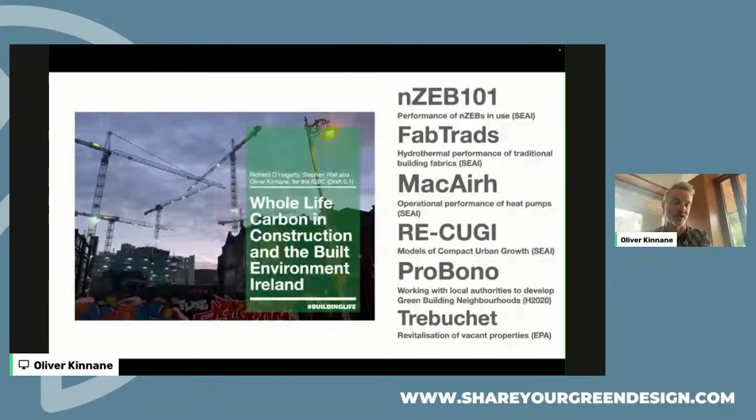We've got projects around historic building fabrics, heat pumps, modeling compact urban growth, and different typologies of urban growth. We're working with local councils on European projects to develop green building neighbourhoods, and with the Environmental Protection Agency on the revitalisation of towns and properties within those towns.

And the work that I present today is really a team effort. There's many people, both at postdoctoral level, research fellow level, and a big team of PhD students working together on these projects to try and deliver and direct us in how we achieve these very ambitious targets that we've set to 2030 and all the way out to 2050.

And I suppose one theme that links all of these projects together is the idea of retrofit, and retrofit is what I'll be talking about today. The title of the talk, 'The Careful Now, Let's Avoid Retrofitting Today's Retrofit,' really stems from an appearance I made last year when I was invited onto a parliamentary committee here in Ireland, what we call the Oireachtas committees.

There I was invited to talk about whole life carbon in construction, particularly the embodied carbon of construction of the Irish built environment. And flippantly, at one point during the conversation, I predicted that we'll end up retrofitting today's retrofits within 10 years. That statement was probably the only thing reported from the whole appearance, and it was met with a high level of hysteria in the media that kind of caught me off guard.

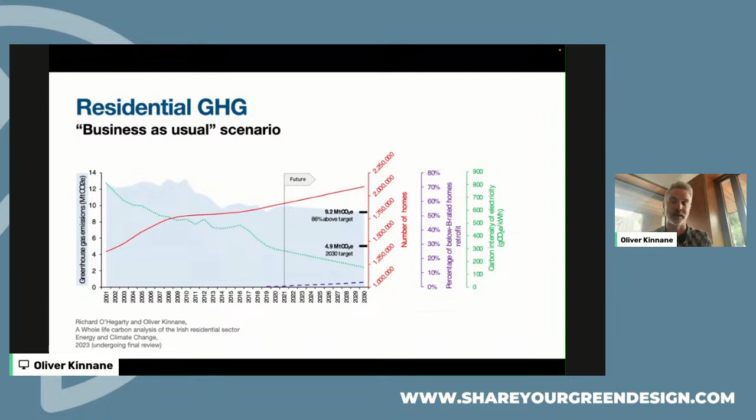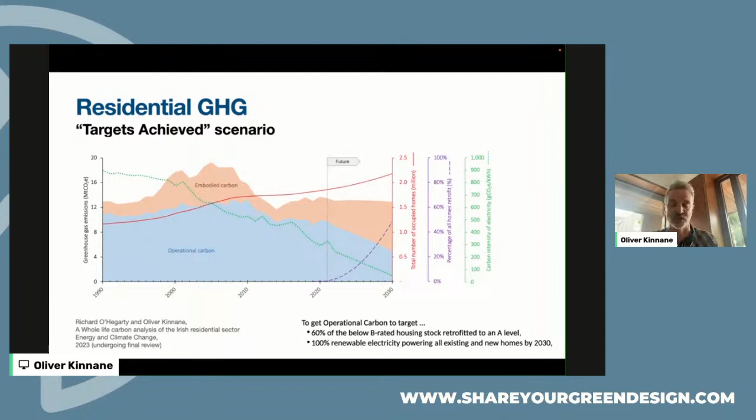We really need to achieve those targets of a reduction in operational carbon, because in Ireland, like in many countries, our population is increasing. We already have a housing crisis, and we need to solve it by building homes. That building of homes is actually going to bring significant embodied carbon with it, so we need to reduce the amount of carbon related to the operation of our buildings if we're going to create space in our carbon budgets for this additional carbon.

If we look at the built environment more broadly, what our studies have shown, and our major paper in this field, the whole life carbon quantification of the built environment, case study Ireland, which was published in Building and Environment in 2022 and is available on Science Direct, is that through a range of accounting measures, the built environment in Ireland accounts for 37% of all greenhouse gas emissions.

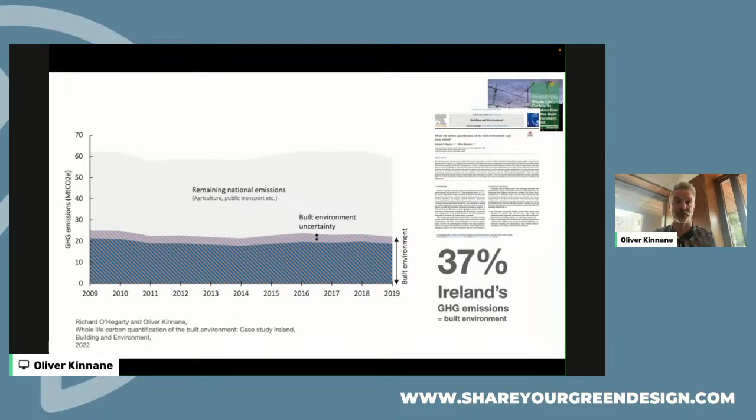So it's as big as any other sector in the country. In Ireland we have a very big agricultural sector, much maligned, and that sector is itself 37% of emissions. So the built environment is as big as the other big sector in this country. And that 37%, which is more or less what other countries have reported, maybe not in as great detail as we have in Ireland, but many countries around the world are somewhere between 30 and 40% of their overall emissions related to the built environment.

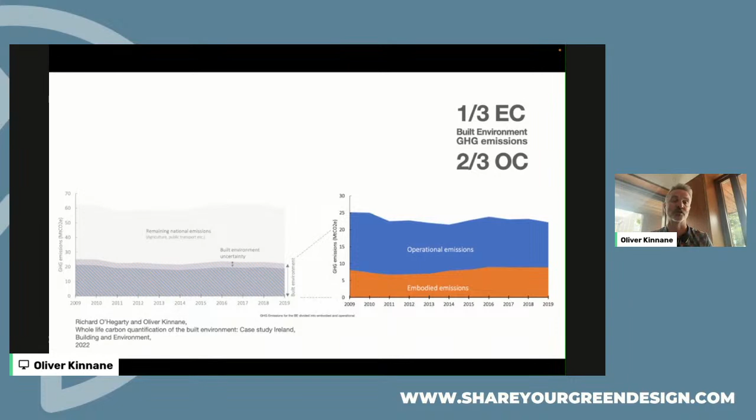In Ireland, that is split one-third, two-thirds between the construction and maintenance of the built environment year on year and the operation of the built environment. So really the key point is that operational emissions are the majority share, accounting for two-thirds of all carbon emissions related to the built environment in this country. So to reduce the overall impact of the built environment, we really need in the first place to reduce the operational emissions related to our buildings.

And retrofit is a key strategy for this. In Ireland, we have a national retrofit policy that says we should retrofit up to 500,000 of our homes - that's over 25% of our homes - by 2030. So it's a massive increase on the amount of retrofit that we're carrying out today.

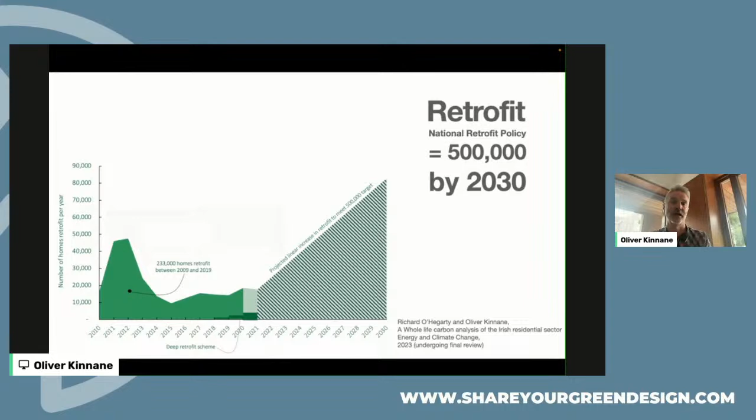So my point is that if we're going to achieve and carry out all of this retrofit, we really need to get it right. We'll end up adding lots of materials to these buildings, and we will have to make sure that we do get it right, and that we get it right first time.

And that's because the embodied carbon of retrofit is not insignificant. We often think that the building of new buildings is the carbon heavy choice in the built environment, and that retrofit and reuse of buildings is not, and is the better choice. But what I'm saying here is that the reuse and retrofit of buildings brings significant carbon emissions itself.

And we've quantified this through looking at a couple of different case study buildings. This is one example of small 40-metre squared social housing in the southeast of Ireland which were retrofit. These are cast concrete one-bedroom homes, retrofit using external wall insulation, renewable PV panels on the rooftops, heat pump technologies - each home getting an individual heat pump, which is questionable - but also windows and building fabric retrofit.

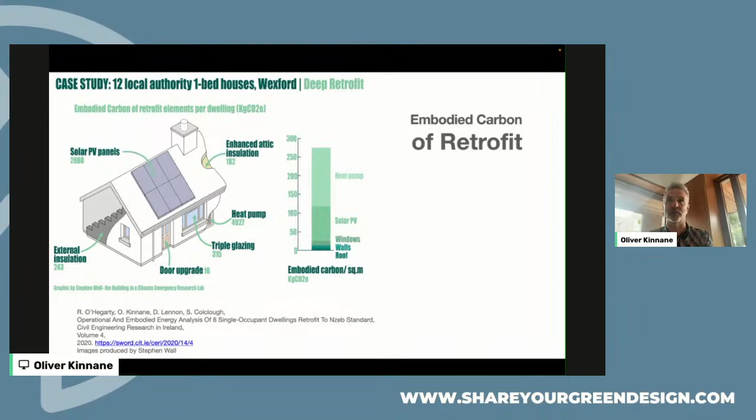And what we see is that the embodied carbon of all of this addition of materials and technologies brings a significant embodied carbon total with it, up to somewhere between 250 and 300 kilograms of CO2 per metre squared of floor area. So that's really quite significant. If we look at the academic literature, particularly in the A boundaries of LCA analysis, we're often looking at an embodied carbon of new homes somewhere between 800 and 1,000 kilograms of CO2 equivalent. So retrofit is somewhere around 25-30% of the impact of new build.

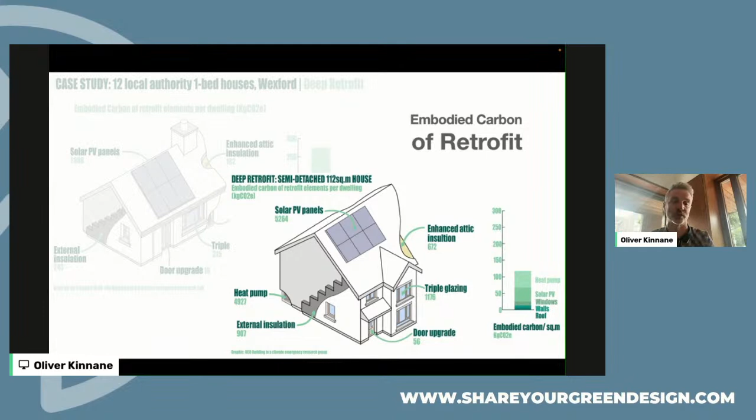Extrapolating that out to a kind of more standard Irish home, this semi-detached home that's built on the edge of Irish towns and cities and creates this continuous urban sprawl - and that's a whole other topic, and we have research projects that look at the alternative choices to development in this country and beyond - but again, we see that these kinds of homes bring significant embodied carbon of over 100 kilograms of CO2 per metre squared of built floor area.

If we look at Ireland's carbon emissions over the last few decades, or all the way back to 1922 when Ireland won its independence and became an independent state, we see some areas where we added a lot of housing, and the fingerprint of that construction of our built environment is very much evident in the overall carbon emissions of Ireland.

We used a lot of concrete, almost 40% of our emissions came from concrete. About another 40% came from metals, so that's the importation of metals into Ireland. We don't produce any metals, aluminium, iron or steel anymore, so we import those emissions from elsewhere. In a consumption-based emissions accounting, we can see that both concrete and aluminium and other metals add up to about 80% of our overall embodied carbon of the materials we use to develop our built environment.

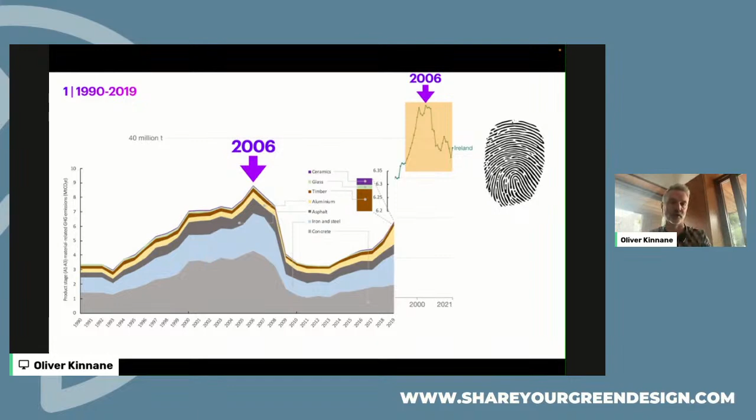Another reason we need to be careful when we talk about retrofit is because when we do retrofit, we don't always get it right. We as a research group do a lot of post-occupancy evaluation of buildings, and looking at one particular one-bedroom small social housing scheme, we wrote a paper on it.

They were all designed to be retrofit from F and G ratings, very low building energy ratings, very poor building energy performance, up to an A2 standard, that's less than 25 kilowatt hours per meter squared per year. What we saw when we went back into those homes post-retrofit is that very few of them are performing at that standard, although you'd expect these small, simple homes to retrofit and achieve those rating levels.

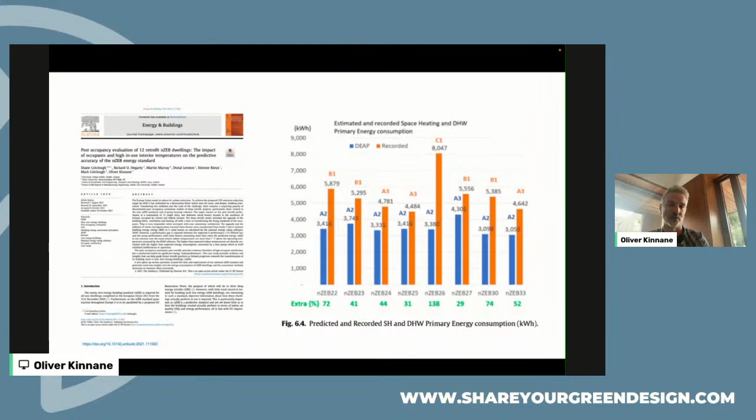In fact, many of the homes were operating in B categories and even in certain cases in C categories. And we see this across a lot of the homes that we monitor.

Going back to the national retrofit policy of 500,000 homes, an additional part of our climate action plan here in Ireland is to add over 680,000 heat pumps by 2030. So not only are we retrofitting 500,000 homes, we're adding heat pumps to all of those homes and changing out the fossil fuel heating systems for electric heating systems, plus more heating systems into new buildings that are going to be built.

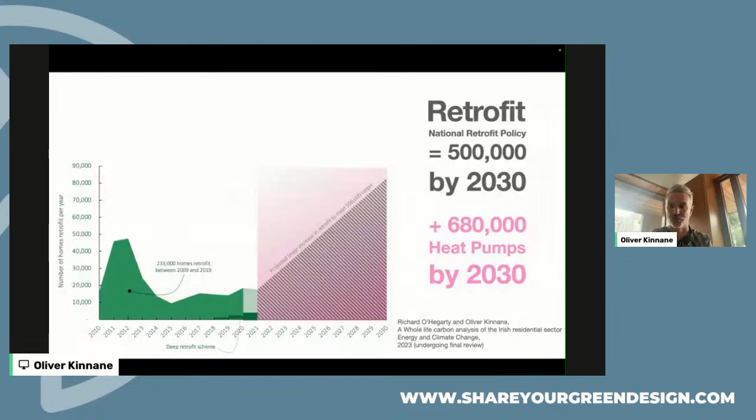We do a lot of work, and we've had a number of projects where we've looked at heat pumps in use in near zero energy buildings, new and retrofit buildings. What we see in some cases, and actually in many cases, is that heat pumps are performing well below the levels that manufacturers claim they'll perform at.

In this graphic, the red dot is the declared performance by the manufacturer, the coefficient of performance, plotted here against the temperature difference between the flow temperature within the heating system and the outdoor ambient air temperature. What we see when we look at the grey dots, which are the in-use performance over a year of operation, is that the in-use performance is well below the optimum performance line as declared by the manufacturer.

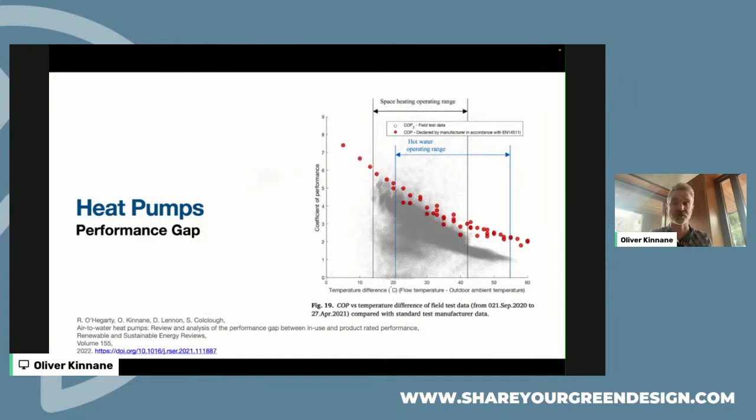What we really see on average is that coefficients of performance of heat pumps are somewhere around 2.5, with manufacturers claiming 3.5 and 4 and even above in newer technologies today. This performance gap is actually seen in a lot of studies that have been done, particularly studies done by UCL, who work with large data sets, and they've seen low performance as well for heat pumps.

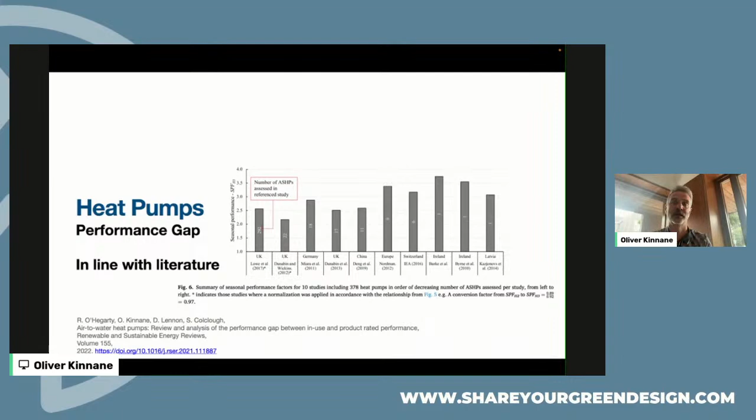This is something I think we really need to be aware of, particularly if we're going to mass roll out this technology between now and 2030. We need to learn how to install these technologies correctly, how to operate them correctly, and we need to inform occupants, particularly home occupants, how to operate these new heating systems that run at much lower operational temperatures than old fossil fuel boiler systems. We need to educate homeowners in how to operate them most efficiently.

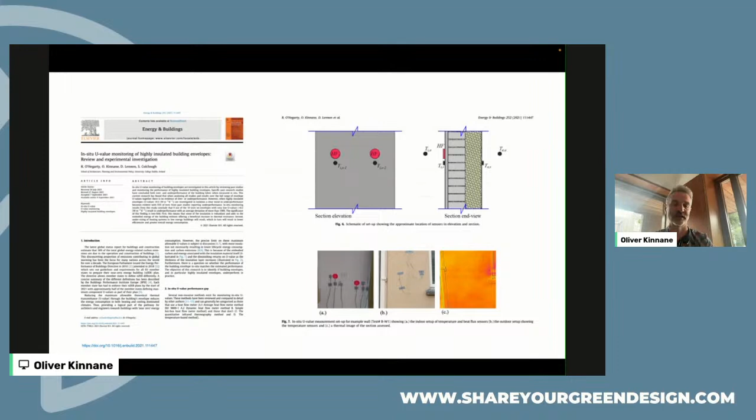Another test study that we did when we looked at retrofit homes was to use heat flux sensors and attach these to the building envelopes to understand the heat flow or heat loss through these building fabrics post-retrofit, in some cases, and also in new builds. But what we see in many cases, particularly in the retrofit examples, is again a performance gap - underperformance of these building envelopes relative to the designed-for performance.

I'm highlighting these things because I think these results are significant - we are carrying out a huge amount of retrofit, and increasing the rates of retrofit year on year in this country, around Europe, and all across the world. But there's actually very little study of whether this retrofit is actually working, whether we're achieving the efficiencies we think we're achieving.

This is a call I always make for much greater funding of research into buildings, particularly as we move towards these mass strategies to try and reduce the impact of our built environment. We need to check, we need to make sure that the strategies we're choosing are actually most appropriate and actually working for our benefit.

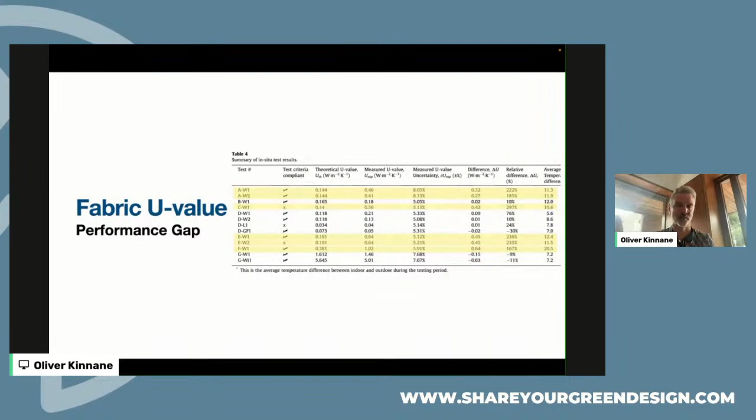Highlighted here in this table, and I direct people to the paper if you're interested, is a number of building envelopes that we tested, many of them showing underperformance, oftentimes by multiples, up in some cases to 200%, 300% over the designed-for performance.

We're still working through finite element modelling studies and further on-site testing, although oftentimes it's quite difficult to get into the building fabric and start tearing it apart to really figure out why these fabric retrofits are not working as they should be.

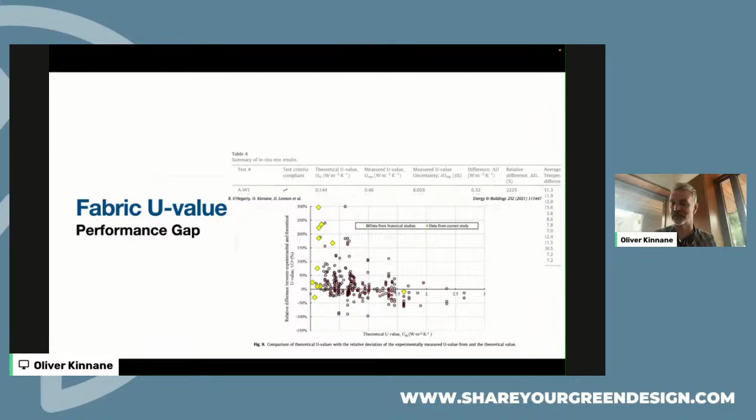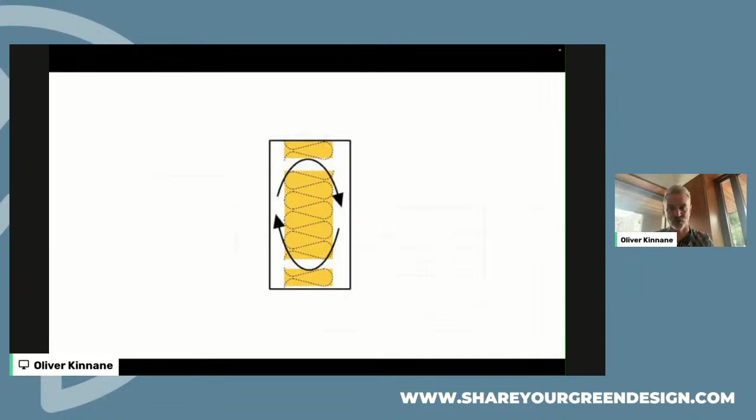But what we're beginning to see through our modelling studies and our on-site studies is that in a lot of cases, when we're adding insulation to building fabrics, we're creating gaps between the fabric and the insulation, and gaps between the insulation layers. What we actually see is convective currents or air currents in and around the insulation, very much undermining the value of the insulation in reducing the conductive heat loss through the thermal transmittance of the building.

Lots more care is required when we retrofit our buildings, I think, is the conclusion of that study.

Another point I'd like to make is that when I say we need to be careful when we do retrofit, it's because we still don't know nearly enough about buildings. We do very little post-occupancy evaluation of our retrofit buildings, so we really only have small pieces of information about the actual post-retrofit performance of buildings, and our knowledge of building physics is still very much at a nascent stage.

Buildings are really complex heat transfer systems, increasingly so as we add new technologies to these buildings. We really need to start learning and researching buildings.

In Ireland, the focus of our building regulations has been very singularly focused on the building fabric and continually reducing the U-value of that building fabric. It's now 0.21 - I think for residential buildings it might even be 0.18 watts per meter squared Kelvin now. That U-value requirement has reduced continuously with every new iteration of building regulations since they were first introduced in the late 1970s.

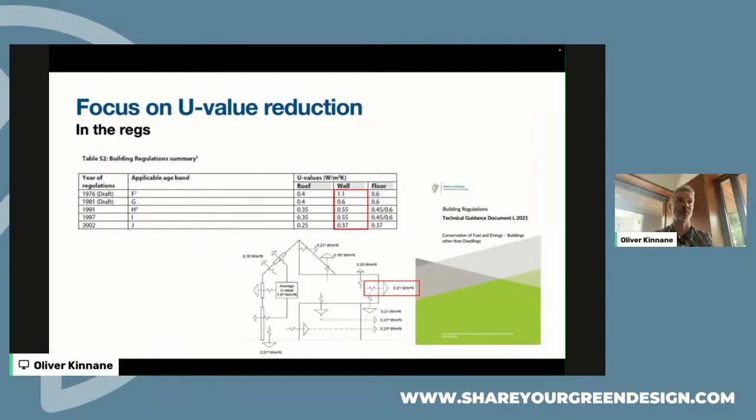What that has meant is that the majority of retrofit, particularly fabric retrofit, is focused on adding insulation to the building fabric. That is okay in the situation of contemporary buildings, where each layer has a particular requirement or purpose, and there are weathering layers to ensure that water doesn't transmit into the building fabric.

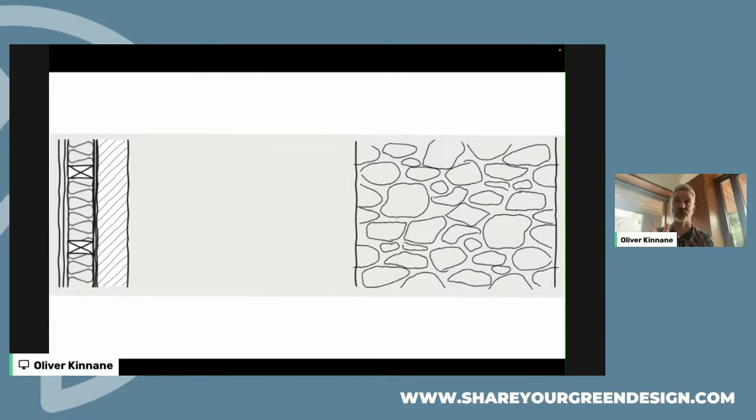So the image on the left is the contemporary building fabric. The image on the right is the traditional building fabric, and 1 in 6 of our buildings in Ireland are built using this or similar kind of fabric, with stone and clay and materials dug up from around the country - different kinds of materials, resulting in quite different kinds of fabrics from around the island of Ireland.

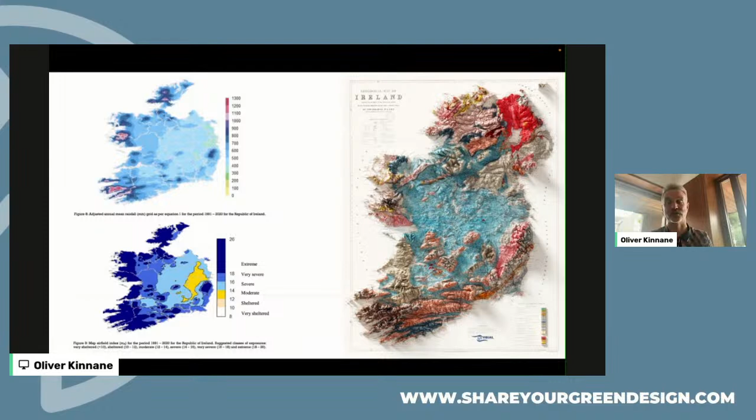Ireland, I think, is a particular case study as an island on the west front of Europe, very much an Atlantic storm-impacted island. What we see is that we have a lot of rain in Ireland - it's not raining today, but it's not far off it, and I bet it's raining out the west of Ireland. We get high levels of rain along the west coast, and we get high levels of wind-driven rain particularly, shown in the bottom left image here.

And what that means is that we get a lot of moisture in our building fabrics.

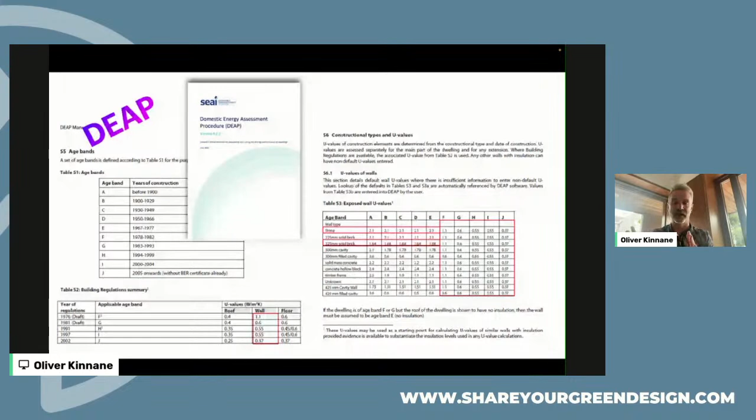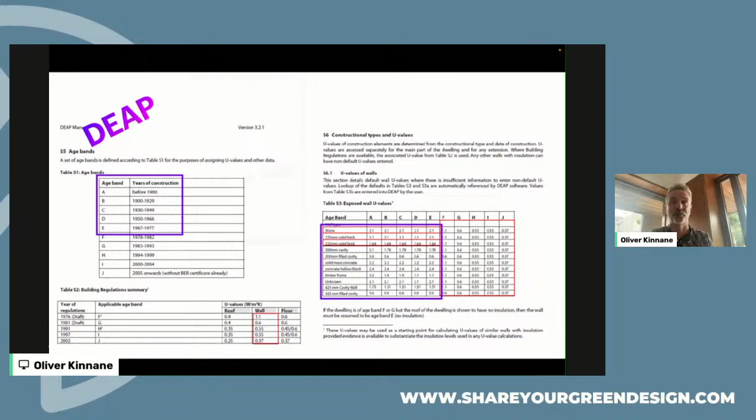When we look at our DEAP assessment methodology, which is how we rate buildings in Ireland, we don't actually have specific U values for buildings built before 1970. Those buildings, for different typologies of construction, are just given default U values. So when we rate these traditional and historic buildings, they often come out with a very low building energy rating, and the homeowner rushes to insulate those buildings using materials that are often not appropriate for buildings with moisture in the building fabric.

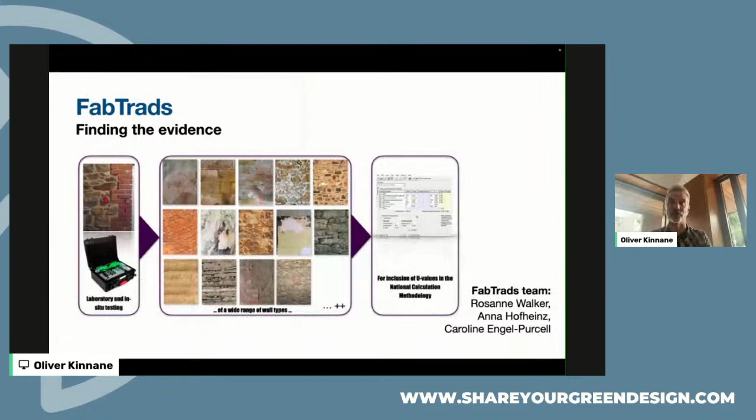We have a project here in UCD called the FabTrads project, supported by the Sustainable Energy Authority of Ireland and the Department of Housing, where we're testing a wide range of historic and traditional building fabrics. When we do in situ testing, we see many of these walls performing with better characteristics than we might presume. Not all of them - particularly in cases of high levels of saturated walls we see poor performance - but in many cases these walls perform better than the default value.

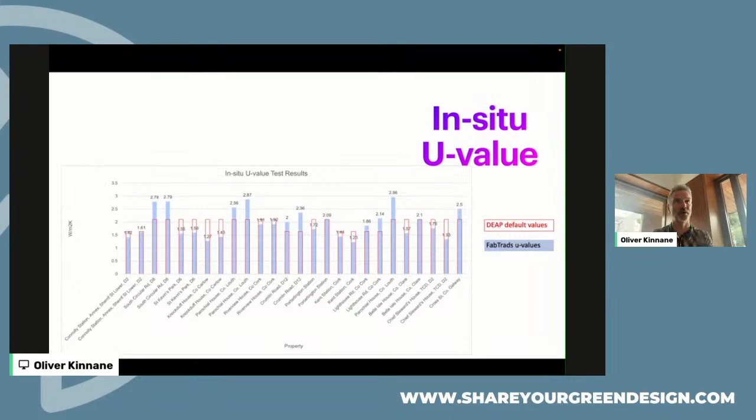The conclusion is that maybe we don't need to rush to insulate these buildings if they're performing better than expected. Certainly we shouldn't be rushing to insulate them using materials that are inappropriate for the long-term sustainability and preservation of these buildings, because adding impermeable materials causes buildup of moisture and risk of mold growth within the walls.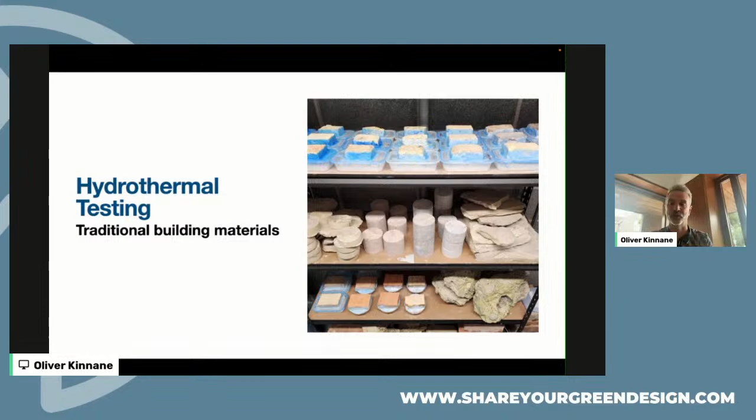We're testing these hydrothermal properties in the laboratory to see, for different brick types and stone types in Ireland, what the uptake of water is. We do that through a wide range of tests of thermal conductivity and different moisture transmittance mechanisms through these building materials.

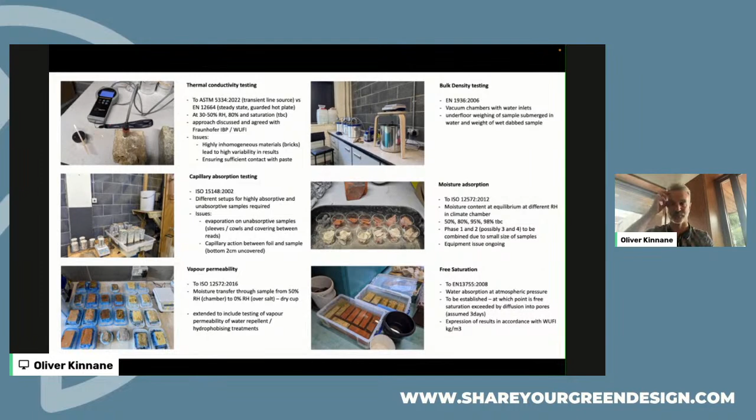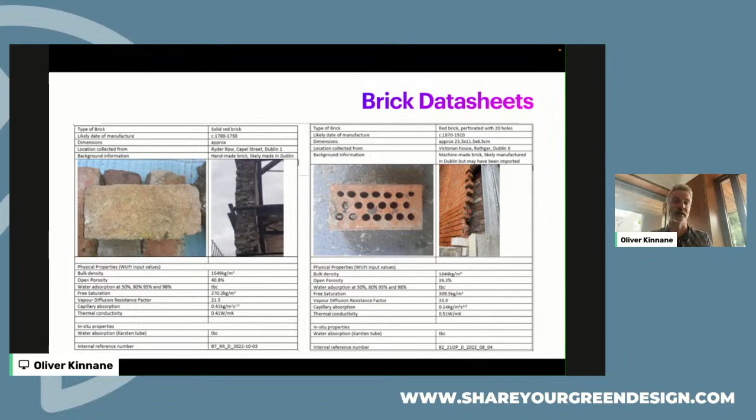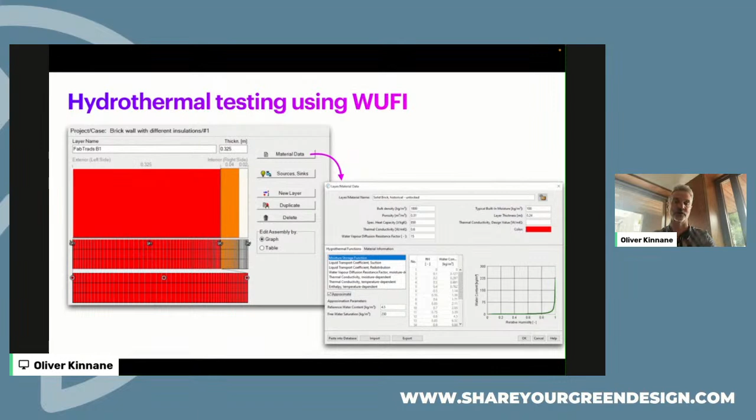In the FabTrads project we're trying to develop data sheets for the wide range of building materials in historic and traditional building fabrics, and bring that database of materials into the WUFI hydrothermal software, where designers and architects can select the Irish material database, select materials with measured properties in the Irish context, and use those to model thermal and hydrothermal movements in the building fabric.

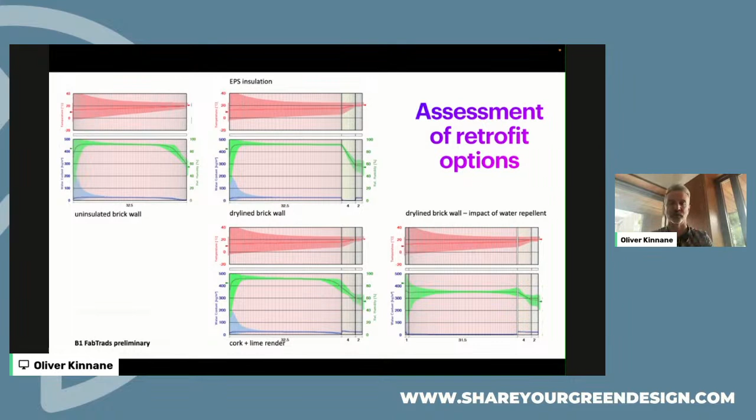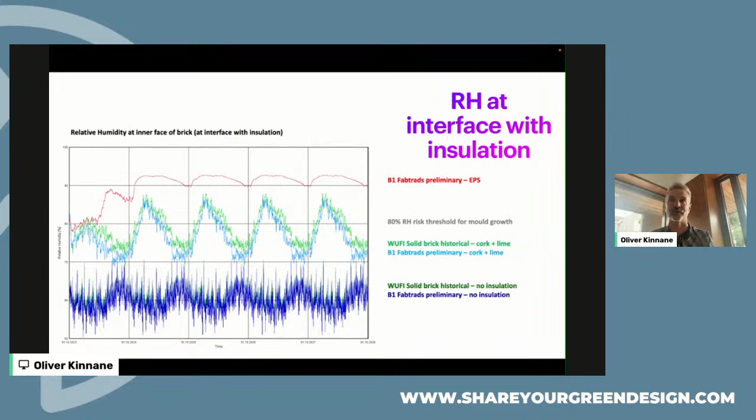I'm not going to get into detail on these modeling studies - this project is only a year old, so these are just preliminary results. But we do see very high levels of risk of mold growth within traditional buildings when we use materials that are inappropriate, particularly for moisture transmittance. When we use impermeable insulation products such as PIR board, phenolic foam, or other polymer-based insulations - which are being pushed continuously in the drive to reduce U values and create more energy efficient buildings - we see high risks of mold growth at the interface between the building fabric and the insulation.

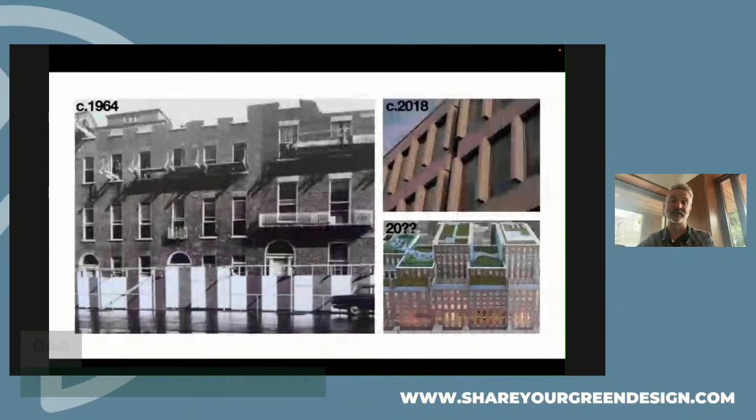Another reason we need to be careful when we talk about or do retrofit is to ensure, from a whole life carbon perspective, that we don't continue on the wrong path. We don't want retrofit to add to the case for demolition of buildings that are presumed to be inefficient. In Dublin, as in many cities around Europe and around the country, we're seeing a number of buildings being torn down and replaced, and the service life of buildings is forever shortening - this is happening more and more.

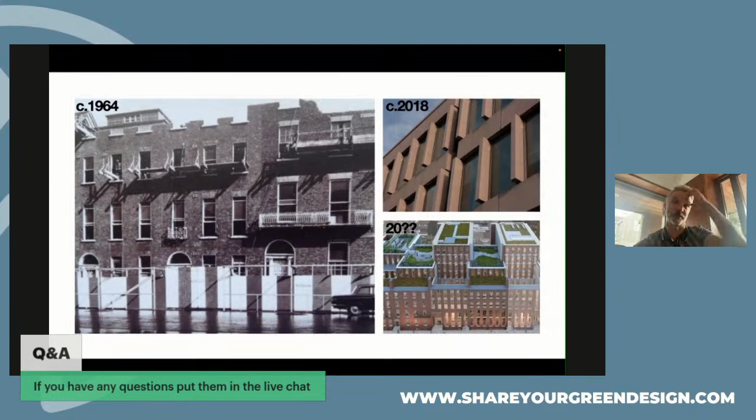There's a significant site here in Dublin City where Grafton Architects have added a lovely new headquarters for our electricity supply board. This is an example of a site which has seen three iterations of buildings in a 60-year period. It went from being the world's longest street of Georgian buildings - demolished in the 1960s and replaced with a modernist precast concrete building - which was then torn down in 2018 to be replaced by the Grafton Architects faux-Georgian building in place today, with an unknown lifetime ahead. Hopefully it'll last a long time.

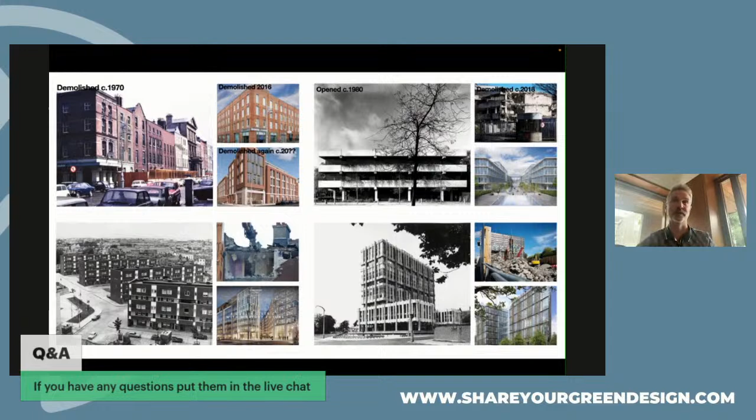But this cycle of demolition and rebuild, demolition and rebuild, is ongoing all over the city, and we're losing gems of particularly our modernist built heritage, to be replaced with buildings of much greater floor area - oftentimes with glass facades operating with very high energy loads, both heating and cooling, throughout the year.

These buildings really embody a significant amount of carbon dioxide. Another example of buildings that my colleagues Ellen Rowley and Philip Crowe are evaluating in detail are Catholic churches in Ireland. We went through a phase of building a lot of churches between the 1960s and 1980s, and with reductions in congregations today, many of these buildings become obsolete and are being demolished.

And what's happening in the case of these kinds of commercial and residential buildings being demolished is that developers are claiming they're not easily retrofit. In this case, they're saying retention is not necessarily more sustainable than demolition and rebuild.

And based on this inspector's report, this building, which might not be everybody's cup of tea, is actually one of the few modern buildings we have from that time period. This building wasn't torn down as a result of this report.

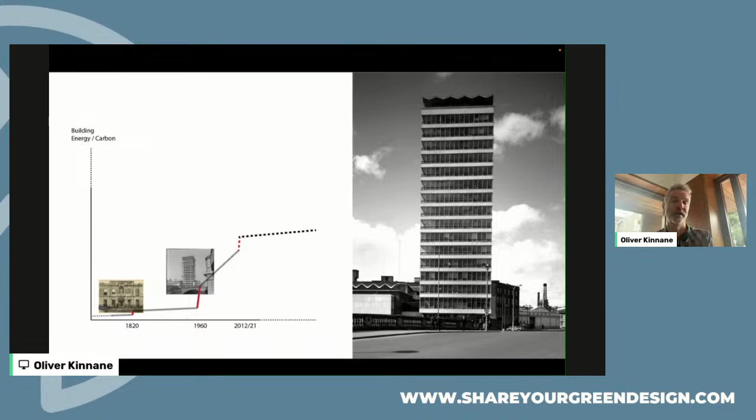It needs to be retrofit, certainly, to improve its performance. But by stopping that demolition and hopefully retrofitting that building sooner rather than later, we've stopped this cycle where we're continually adding carbon by building new buildings, letting them live for ever shorter service lives, then demolishing them and continuing this cycle of demolition and rebuild.

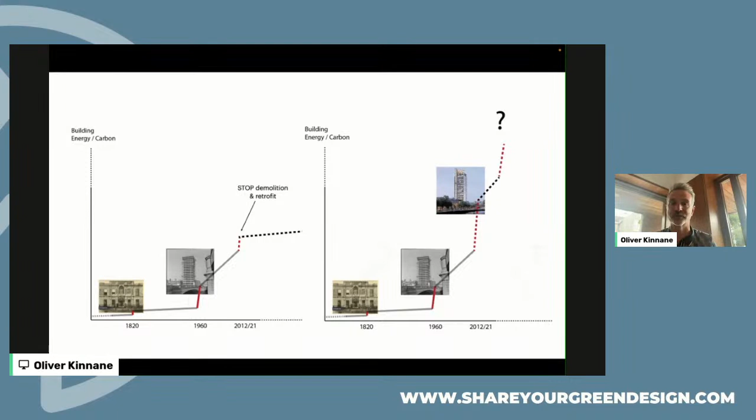So we need to do retrofit. I think the point I'm trying to make through this talk is that we just need to learn how to do it right, so we can get on this path to net zero by 2050. Because if we don't learn how to do retrofit right, we haven't a hope of meeting these targets.

I think what's required to achieve that, particularly for us who work in the built environment, is a lot more care, a lot more research, a lot more knowledge into buildings, building materials, building operation, patterns of occupancy, the people who use our homes and the technologies within those homes, and a lot of collaboration across different fields and people working across the built environment. Then we might get on a path to net zero by 2050. So thank you, that's my talk.

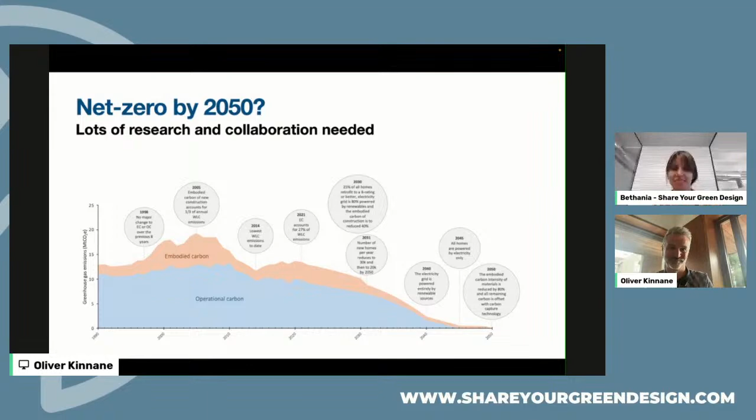Thank you, Oliver, this was a very insightful presentation, highlighting how important it is to retrofit existing buildings, but also to be smart when we first build them, and how every decision we put into the building is important. We have a big challenge at the moment in the industry.

But I also want to highlight what you mentioned about how to make informed decisions, right? Because it's important to bring together academics, researchers, and innovators, but also industry experts and policymakers, and even the homeowners who are the ones who are going to be using the building in the end. So if we create a very efficient building, but then in the end we keep the windows open while we have the heating on, it's for nothing, right?

So yes, about the importance of informed decisions, and the importance of having data sets and data about buildings, building systems, new technologies, old technologies, the tradition in construction, and also the materials, the new materials and existing ones. I think that's of major importance.